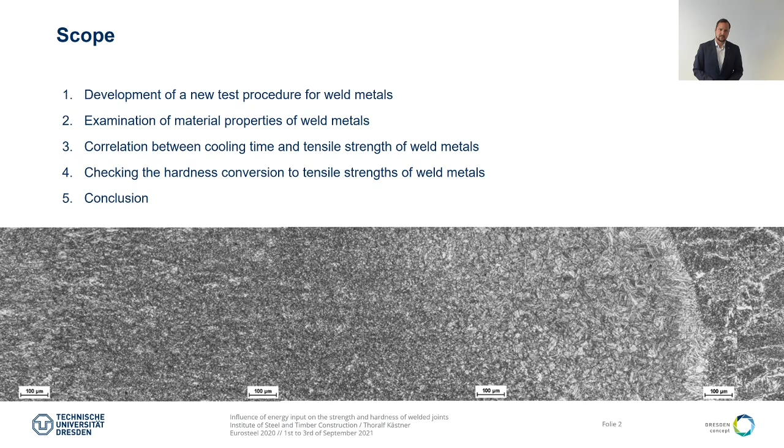So, first of all, why do we need a new test procedure for weld metals? Usually, we determine the load-bearing capacity of welded joints by using full-scale tests.

So therefore we have to cover a huge number of influencing factors to really have a deeper knowledge of the load-bearing capacity of welded joints, and therefore we decided to develop a small-scale test and use engineering models.

We also use them for the normal tensile test or for the Charpy impact test, to transfer those results determined with a small-scale test to the component level.

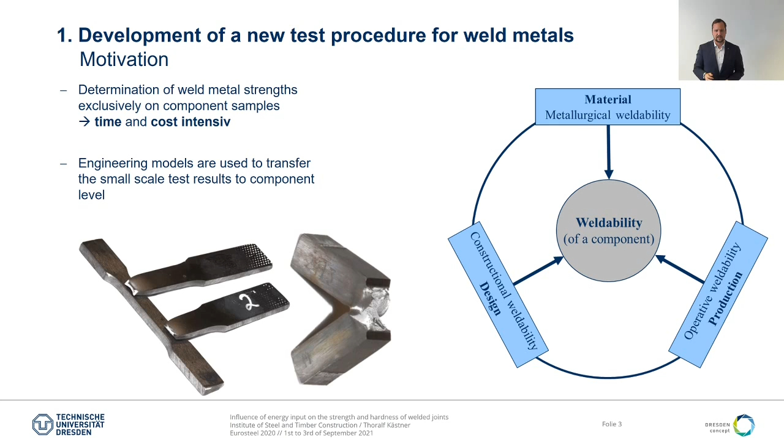And with these small-scale tests we can cover a huge amount of the influencing factors from the material and the production with a simple test method. And this is also one of our design principles.

We wanted to have a flat tensile specimen to have a really easy execution of the test.

We needed a defined size and geometry of the weld to easily determine the strength and the stresses which are acting within the weld metal.

And the failure needed to take place in the weld metal, because only then can we transfer those results to the component level.

Otherwise, when the failure takes place in the base metal, for example, we cannot transfer those results, because we just know our weld metal has a higher strength than the base metal, but we do not know the exact strength of our weld metal.

And of course, the test specimen should be suitable for different material combinations and production parameters, so that we can cover both undermatching welds, where the weld metal strength is lower than that of the base metal,

but also overmatching welds, where the failure usually should take place in the base metal, but as we wanted to determine the weld metal strength, the failure needed to take place in the weld metal.

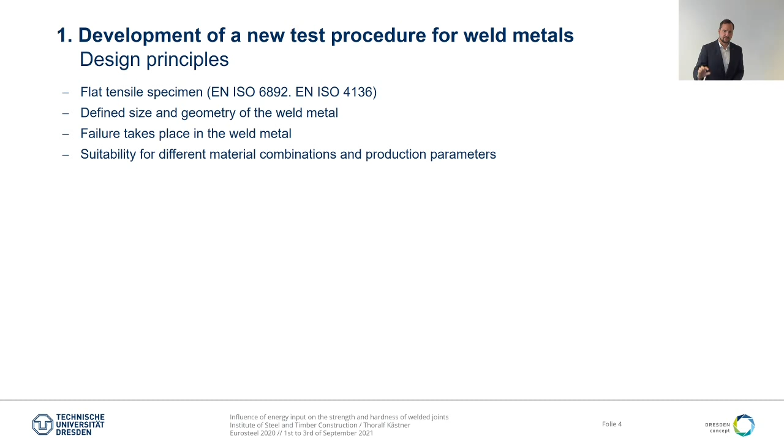And therefore we decided to use a specially designed flat tensile test specimen, where we have a defined size and geometry of the weld and also a controlled notch factor at the weld seam.

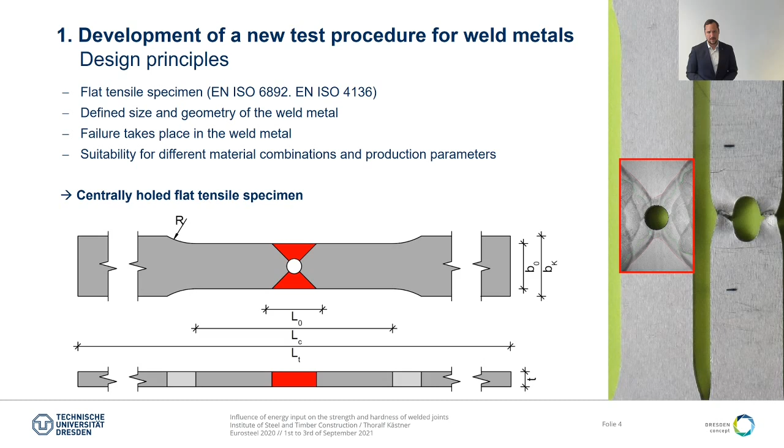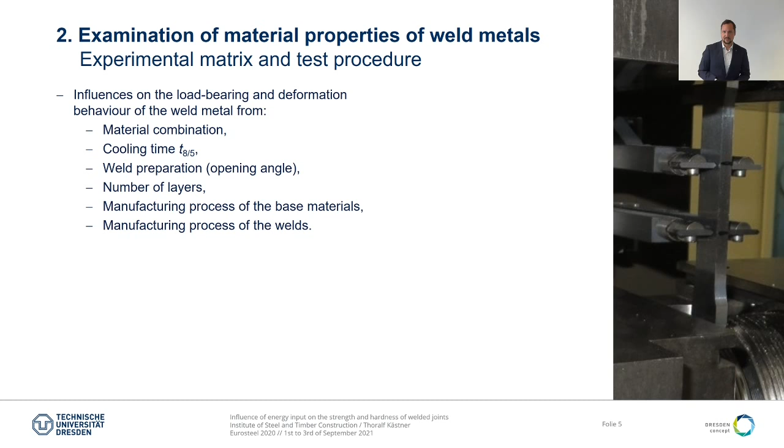Those tensile strength mismatches highlighted here were the material combinations we examined within our experimental research, and as you can see we have undermatching of about 50%, but also overmatching up to 23%.

Furthermore, we examined the influence of the cooling time, the weld preparation - in this specific case the weld opening angle - the number of weld layers, and the manufacturing process of the base metal.

As you can see, we have both thermomechanically rolled steels as well as quenched and tempered steels, and also the manufacturing process of the welds.

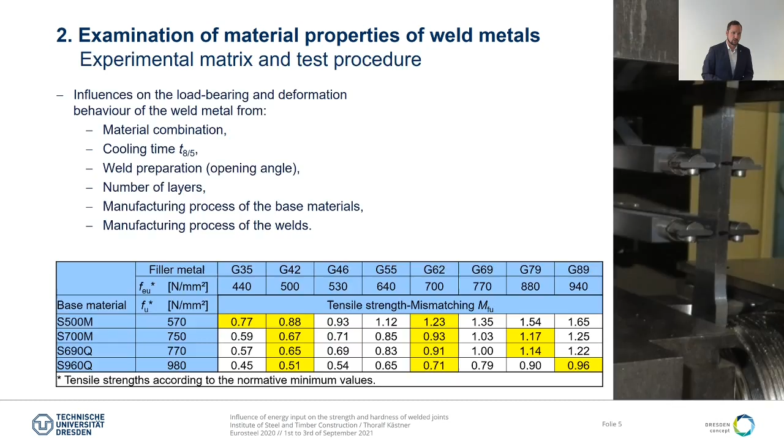Most of our welds were fully mechanized, but some were also welded by hand in construction workshops. So first of all, I want to give you an insight into our experiment on the influence of the base material.

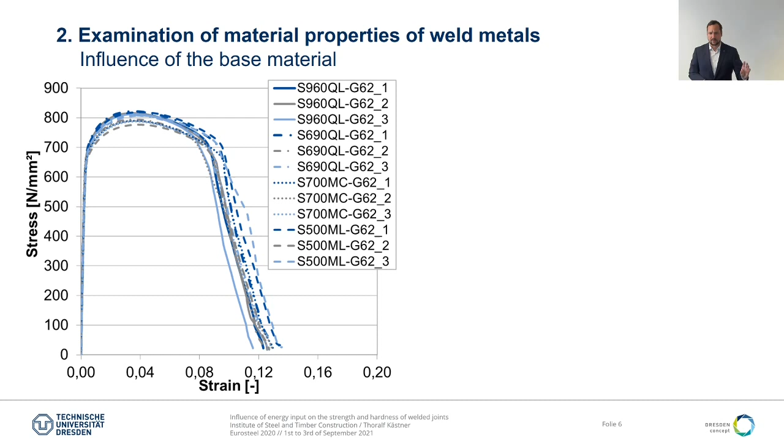And what we can see is that there are no significant differences. Having a closer look at the mechanical properties, we can see that the base material has more or less no influence on the strength properties.

We have a scattering within the strength values we expected, and also for the elongation we have a large reduction in the uniform elongation, but looking at the total values, this reduction is also negligible.

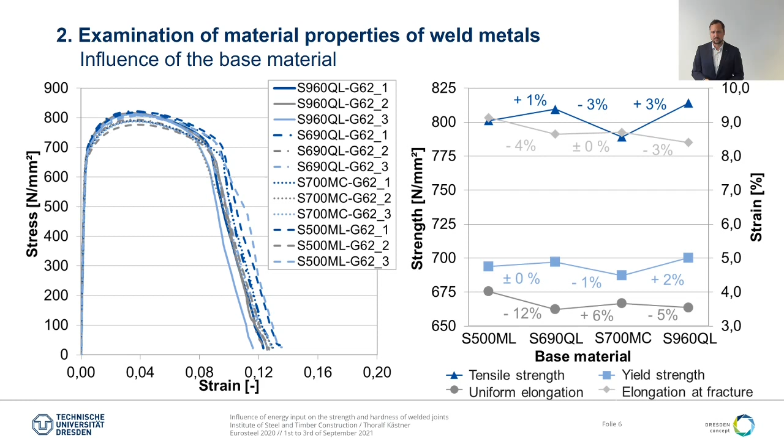So by using this specific test specimen, we could find out that there is no specific influence of the base material on the strength of the weld metal.

But what we can see is that there is a huge impact of the cooling time t8/5 on the mechanical properties.

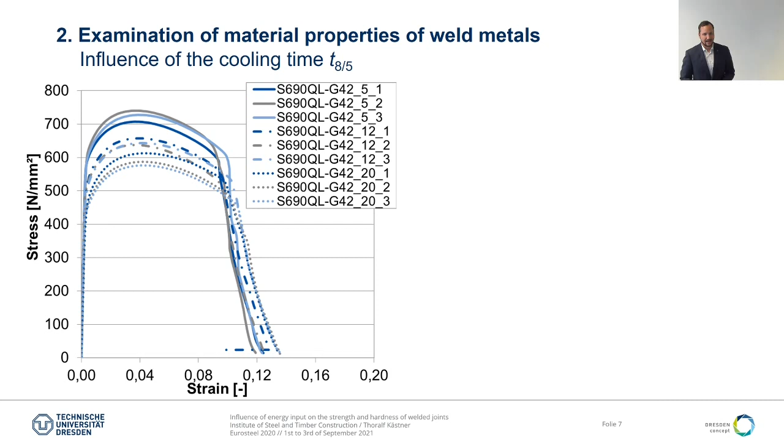Again, on the left side we have stress strain curves for 3 different cooling times of the material combination S690QL in combination with a G42 for cooling times of 5 seconds, 12 seconds and 20 seconds. Having a look at the mechanical properties, we can see a large reduction in strength and an increase in ductility of the welds.

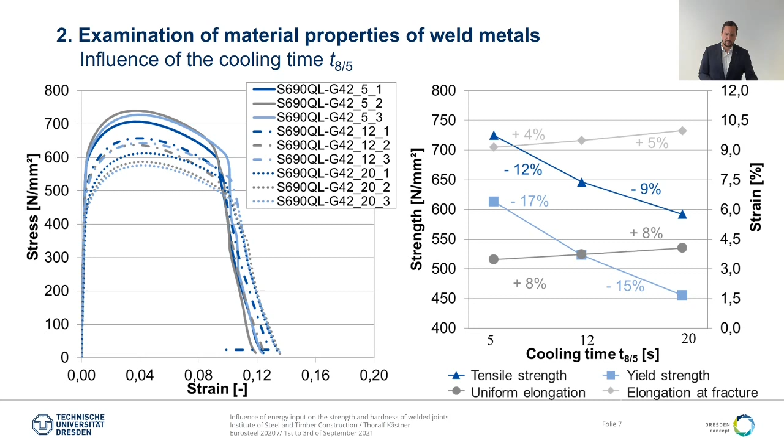So the cooling time is a very important influencing factor on the mechanical properties of welds, which should be covered in all our examinations with the focus on welded joints. So now it's interesting to describe this behavior of the tensile strength with regard to the cooling time t8/5.

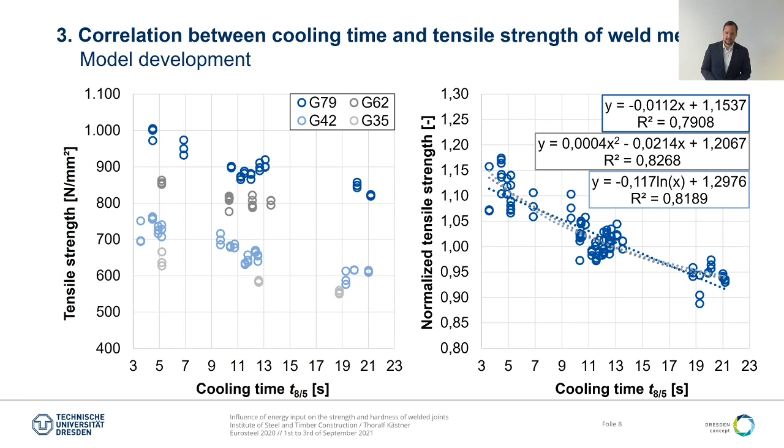We can describe this behavior with different mathematical functions: a logarithmic function, a linear function, and also a quadratic function. All of these functions show a more or less good correlation. So within the next step, we decided to compare our results to results from the literature.

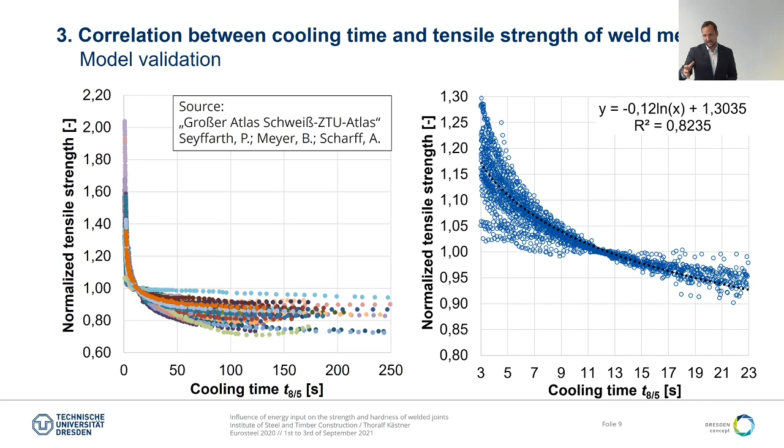Having a closer look at our time period of the cooling time, we can see that we have again a more or less comparable correlation to our results. So again, you can see them here, and also the regression function is more or less equal. So we can see that the results we achieved are representative for a huge amount of filler metals.

Of course, there is at the end a large scattering, especially for short cooling times, which depends on the different filler metals and their different transformation behavior on the crystallization size. But at the end we have at least found a general function to describe this behavior of the tensile strength and the cooling time in general.

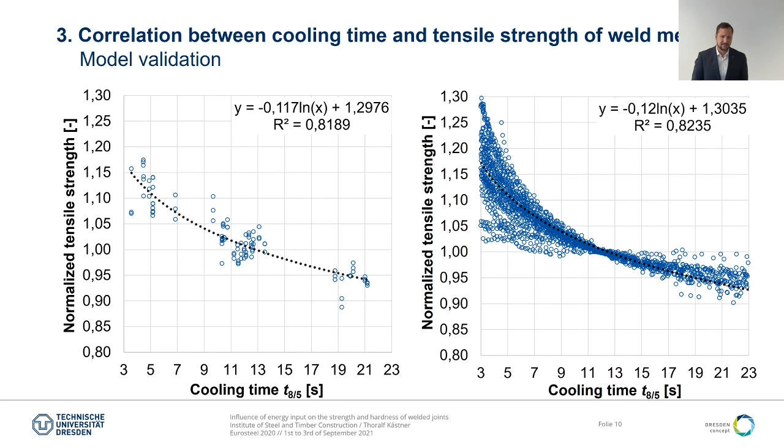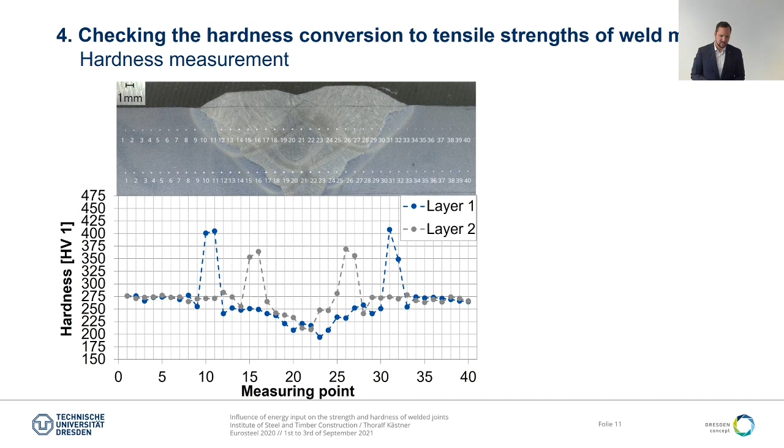So we also performed hardness measurements here in 2 layers. Layer 1 is the upper layer, layer 2 the lower layer, to have more information about the weld cross section at the end. And what we can see is that we have interesting points where we also can examine the influence of the upcoming weld layers.

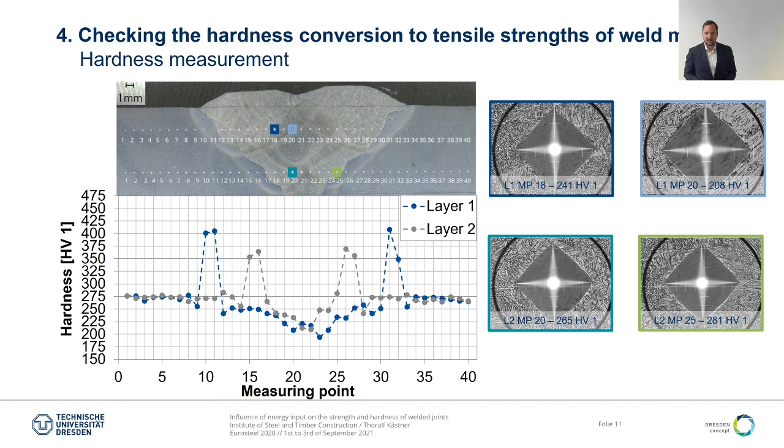I have shown some microsections here for you. The colors of the frames are representative for the positions you can see on the left picture, and we have different microstructures and therefore different hardness. So what we can see is that our microstructure is not homogeneous, but we have large differences and therefore also large differences within our hardness.

But there is a Eurocode, the EN ISO 18265, and this code gives us the opportunity to correlate the hardness value and the tensile strength of the weld. And we examined this.

We use the mean values of the integral hardness values, so all hardness values over the cross section were used, and we also take into account the standard deviation of our hardness values. So what we can see is that we have a large scattering and there's not such a good correlation with our test results.

So therefore we decided to have a closer look and just take into account the hardness values which were in the failure area of the weld. But what we can see here is also that there is not a good correlation at the end.

And within this code it's also mentioned that you need to take into account a specific standard deviation of about 85 Newton per square millimeter for the test results, and therefore they are usually not useful for our design formulas, because of this large scattering we get really conservative tensile strength values to use.

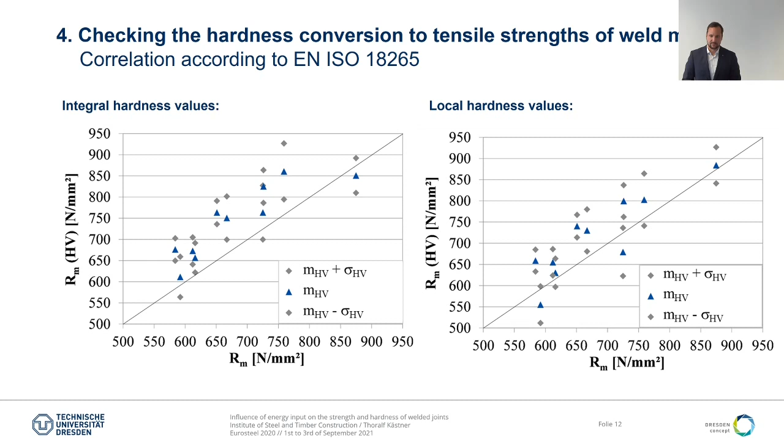So therefore the test procedure we developed is a good alternative to determine the mechanical properties of welds in a good way. And this is also one of our main findings.

We were able to determine the mechanical properties of weld metal experimentally, and we found out that the weld metal properties are mainly influenced by the filler metal and the cooling time t8/5. All other influencing factors were more or less negligible.

We found a functional description of the weld metal properties as a function of the cooling time t8/5, which shows really good agreement with our expected values. So we have the opportunity to expand the field of cooling times we have covered within our experimental research, to have a deeper knowledge of the behavior of our material properties.

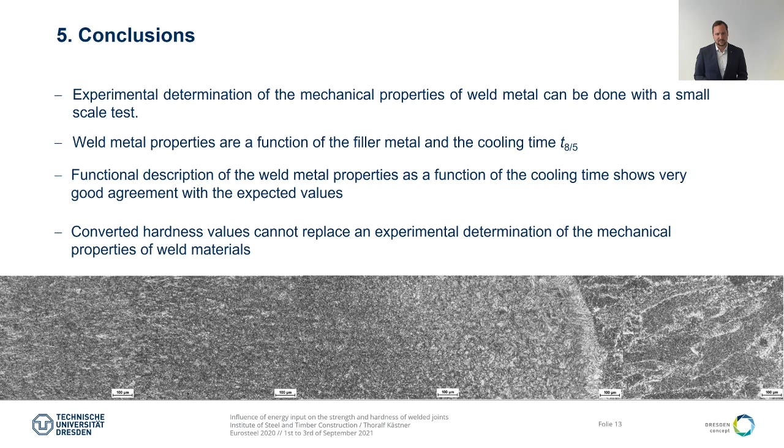And finally we found that these converted hardness values cannot replace experimental determination of the mechanical properties of weld materials.